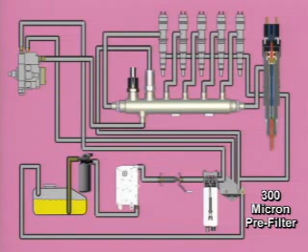Fuel is drawn from the vehicle tank through an OEM-supplied 300-micron pre-filter by the electric fuel transfer pump.

Fuel enters the fitting at the bottom of the ECM cooler located on the left side of the cylinder block. This allows the inlet fuel to absorb the heat generated by the control system electronics to help increase their life.

From the top fitting of the ECM cooler, fuel then flows through the electric fuel transfer pump. From the fuel transfer pump, the fuel continues onto the fuel filter head and the optional fuel heater.

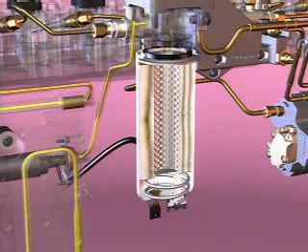From the fuel filter head, fuel flows through the engine-mounted fuel filter, which has a 7-micron absolute rating. The filter also contains the water separator.

From the filter head, the fuel enters a port in the high-pressure pump housing and is then routed internally to the gear pump. The fuel is pressurized to 6 to 9 bar in the gear pump.

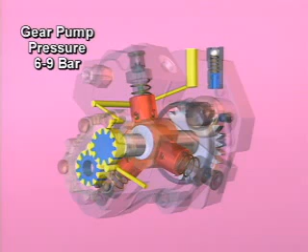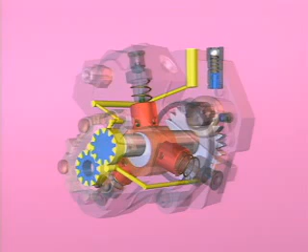Fuel then flows through an internal drilling to the high-pressure fuel pump. The fuel supplied from the gear pump first flows to the fuel return overflow valve.

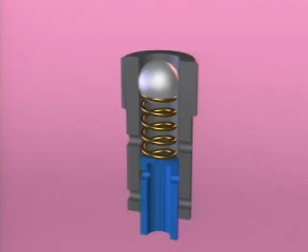An orificed flow path in the fuel return overflow valve provides a constant supply of fuel flow. This constant flow is used to lubricate the high-pressure pumping assembly components.

As fuel flow increases, the plunger moves up and a passage in the plunger aligns with the port to supply increased flow to lubricate the pump.

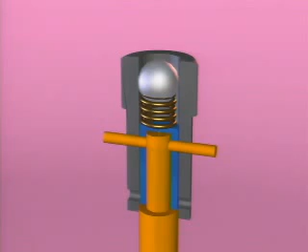As fuel flow continues to increase, the plunger moves further upward and uncovers the lower side exit port. This port dumps all the extra fuel that is not used or needed for lubrication back to the gear pump inlet.

Fuel delivery to the fuel pumping chambers in the fuel pump is controlled by the ECM through an electronic fuel control actuator in the pump.

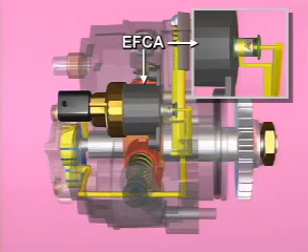The fuel temperature is calculated by the EFCA coil resistance.

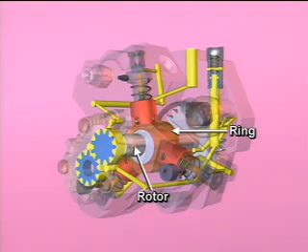As the pump rotates, the eccentric lobed rotor causes the ring to move the plungers up and down in their bores. As each plunger retracts, this allows the check valve to open and allow fuel to enter the pumping chamber.

Continued rotation causes the plunger to reverse direction and pressurize the fuel in the pumping chamber. This high-pressure fuel flows out of the pumping chamber through a check valve and combines with the flow from the other chambers.

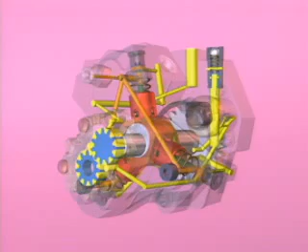This high-pressure fuel then flows out of the high-pressure fuel pump outlet to the fuel rail. This pumping assembly pressurizes the fuel to injection pressures of between 300 and 1600 bar, depending on current engine operating conditions.

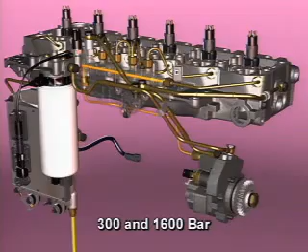The fuel rail is protected from any malfunction causing overpressurization by a pressure relief valve.

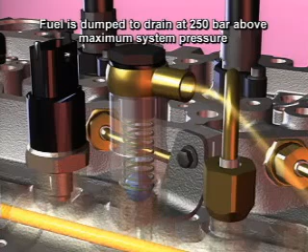At 250 bar above the maximum system pressure, the fuel is dumped to the drain by the pressure relief valve. For example, at 1850 bar, a 1600 bar system begins to dump excess fuel to the drain.

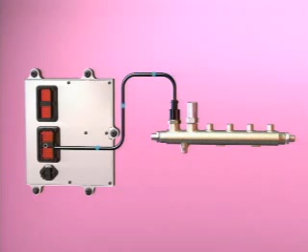Pressure is monitored at the ECM by a sensor mounted in the fuel rail.

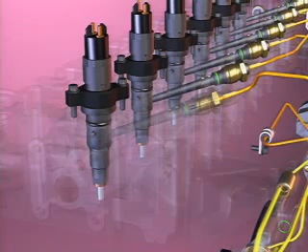Individual lines supply fuel from the fuel rail to the high-pressure connectors in the cylinder head. Fuel flow continues to the injectors.

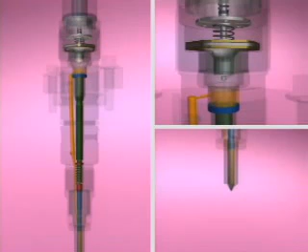Fuel flows through the supply inlet passage to fill the injector nozzle and the control chamber above the injector plunger.

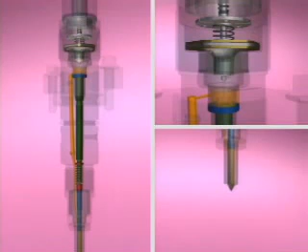Injection begins when the ECM energizes the coil and allows the valve ball to lift off of its seat. The reduced pressure above the control plunger allows the needle to lift off of its seat and high-pressure fuel to flow into the cylinder through the nozzle.

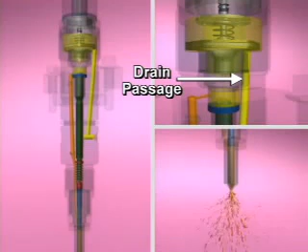Since the drain passage is slightly larger than the supply passage, the fuel pressure above the control plunger does not build as long as the valve ball is off its seat.

To end injection, the ECM de-energizes the coil, which seats the valve ball. The pressure above the control plunger and the force of the spring causes the needle to seat in the nozzle and end injection.

Fuel flowing out the fuel return from the injector flows back to the fuel drain block.

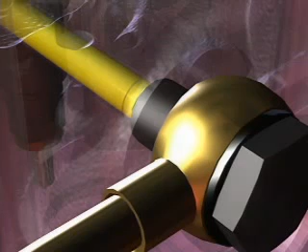The drain line check valve is installed in the fitting in the cylinder head. This check valve maintains 1.3 to 2 bar backflow fuel pressure on the injectors.